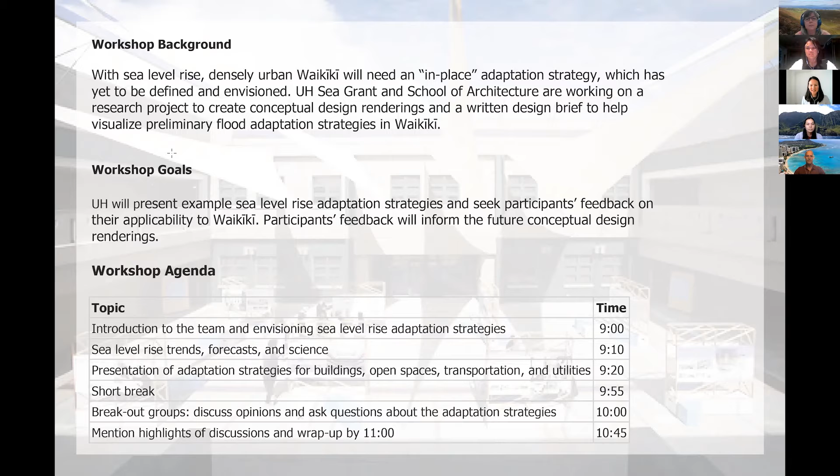To give you a little bit of background on where this workshop fits into the larger 2-year research project: first, faculty and students conducted background research, learning from emerging design, flood resilience standards and guides, case studies, and flood hazard maps. We identified the flood adaptation strategies that seem relevant for Waikiki, which we'll share and solicit your feedback on today.

Next, students will create site-specific urban and architectural renderings of a habitable, attractive, economically vibrant Waikiki with flood adaptation strategies. Finally, we will again meet with stakeholders to review and provide feedback on those draft renderings before revising and publicly sharing them. The goal of the renderings is to contribute to design guides, educational presentations, pilot projects, and new policies or incentives that prepare for future flooding.

So we're on the same page when I say renderings or diagrams, here are some examples so we have a common understanding of those terms. We'll return to these at the end of the presentation.

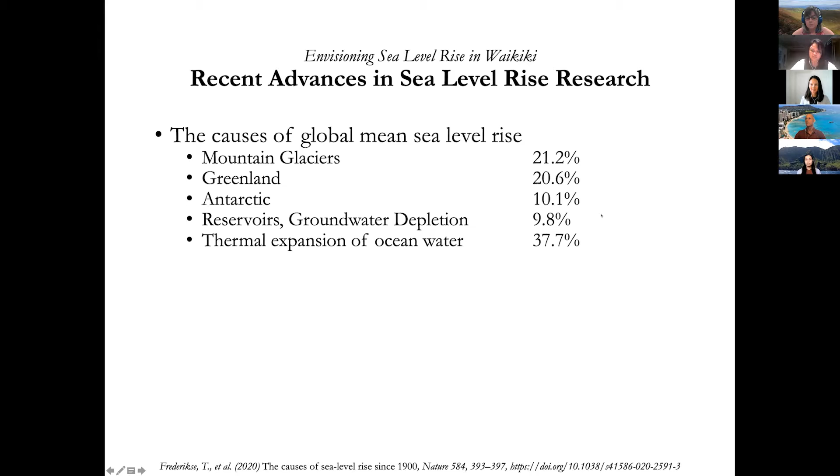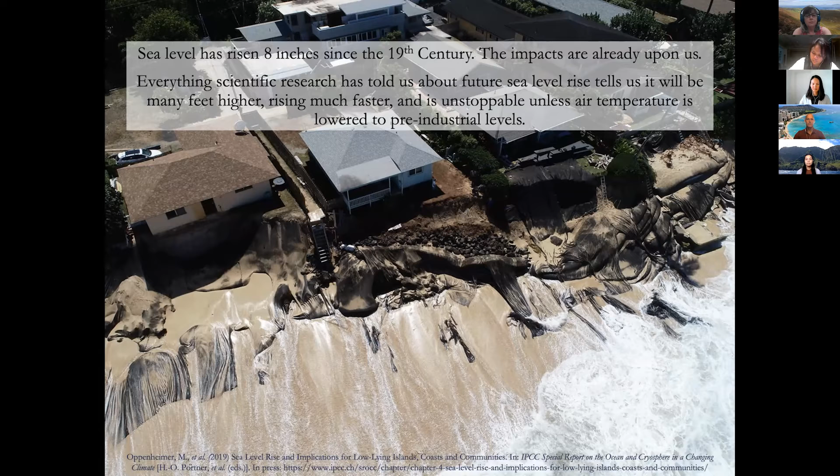Everything scientific research has told us about future sea level rise tells us it will be many feet higher, rising much faster, and is unstoppable unless air temperature is lowered to pre-industrial levels. The ocean will take many, many centuries, in fact beyond 1,000 years, to fully equilibrate water temperature with air temperature. And in so doing, it will continually thermally expand, even if we stop global warming, and even if we begin to pull CO2 out of the atmosphere.

It's been said that we need to lower atmospheric temperature to pre-industrial standards in order to get the ocean to stop thermally expanding. Hence, as Michael Oppenheimer, lead author of the 2019 IPCC report on sea level rise, says, there is no scenario that stops sea level rise this century. We've got to deal with this indefinitely.

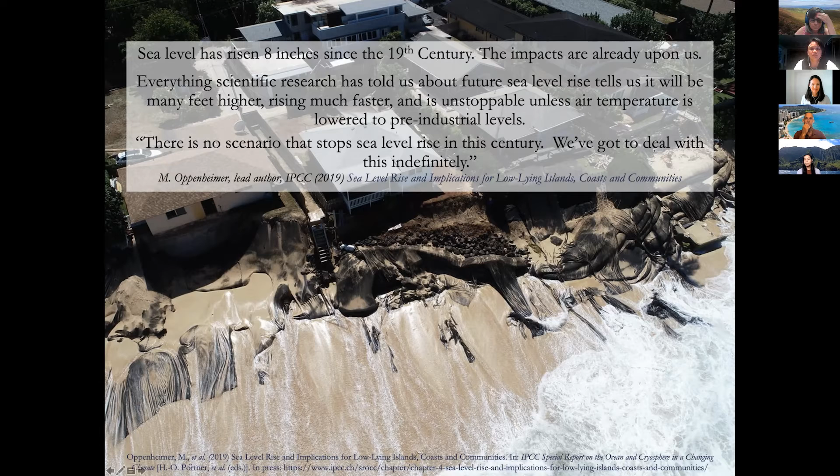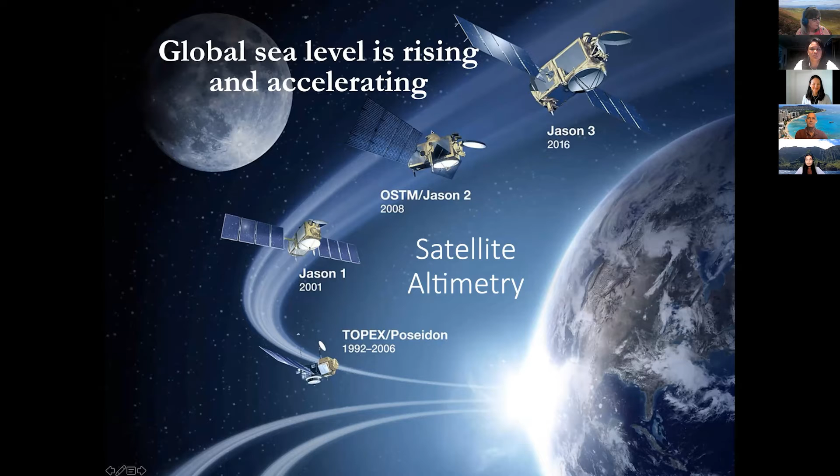So we measure sea level rise beginning in 1992 with a series of satellite altimetry missions. First was TOPEX Poseidon, and then JASON's 1, 2, and 3. These are combined missions with the European Space Agency and NASA. Here you can see the data from each of these missions. The long-term rate from the beginning of the time series in 1993 is a little over 1 foot per century.

But in the last decade, it's accelerated and it is rising at a rate of about 1.5 feet per century. And the current rate of acceleration of this time series would put it at a little over 2 feet by the end of this century. Now, the author of this information is Steve Nerem.

He published a report in 2018 extrapolating or extending the rate of acceleration, and he commented that our extrapolation assumes that sea level continues to change in the future as it has over the last 25 years. Given the large changes we're seeing in the ice sheets today, that's not likely. What he's indicating is that 2.1 feet as an estimate of global mean sea level rise by the end of the century is probably an underestimate.

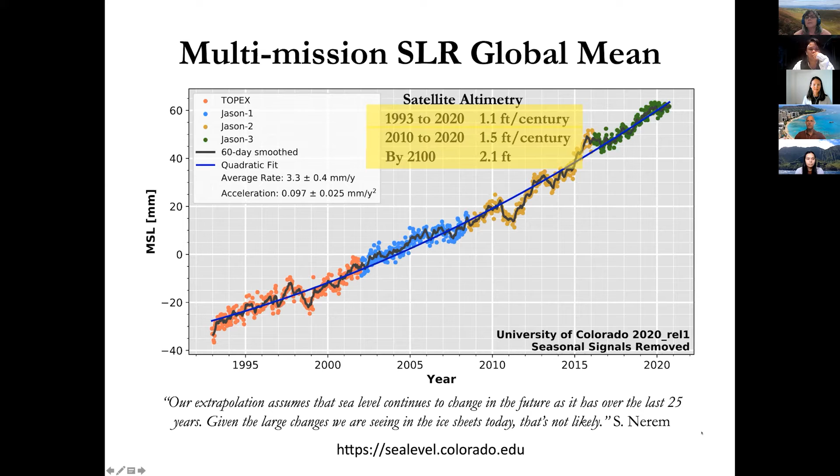So in 2020, the temperature of the oceans set a record for heat storage from the atmosphere. And as I've mentioned, it'll take over 1,000 years for the ocean to come into equilibrium with the air temperature. This entire process will lead to continued thermal expansion.

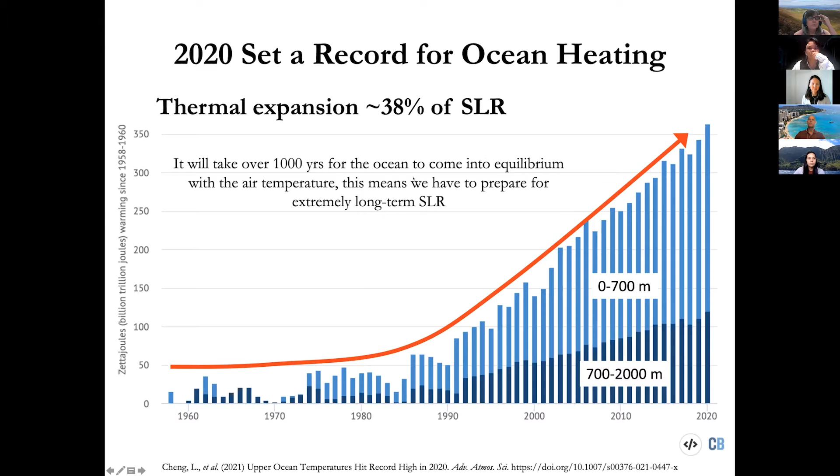Greenland is melting. The rate of mass loss from Greenland has quadrupled in the past decade. Researchers have stated that the Greenland ice sheet discharge into the ocean is far surpassing snow accumulation, and the entire ice sheet is in a constant state of loss. Even if climate change stopped, the ice sheet would still be losing mass.

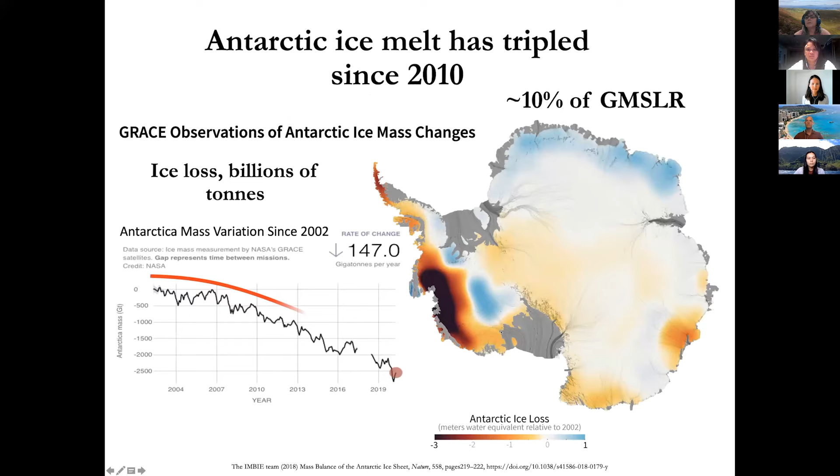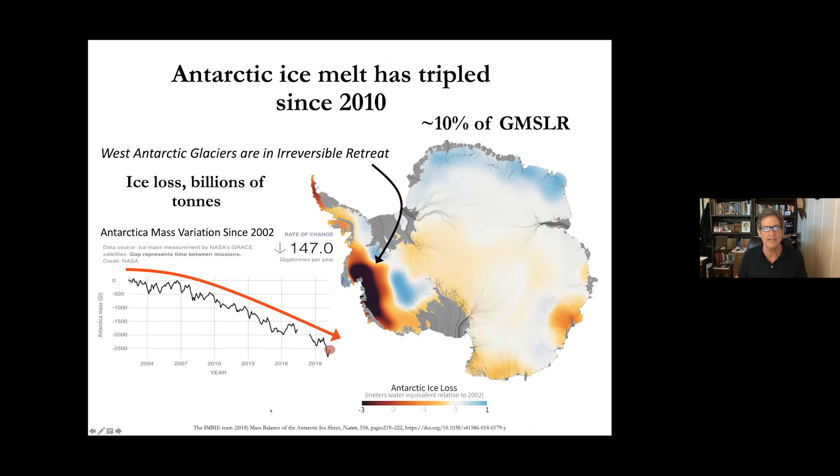Antarctic mass loss has tripled since 2010, especially this dark area where we have a number of ice streams flowing into the ocean in West Antarctica. Especially dangerous are the Pine Island Glacier and Thwaites glaciers, both shown here.

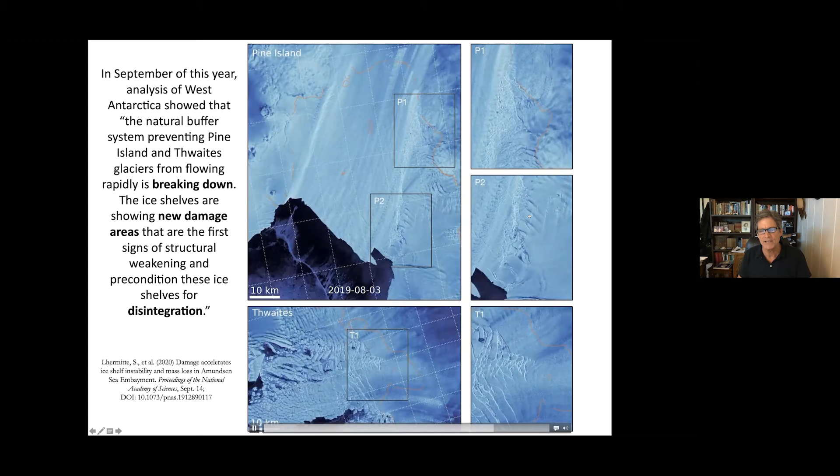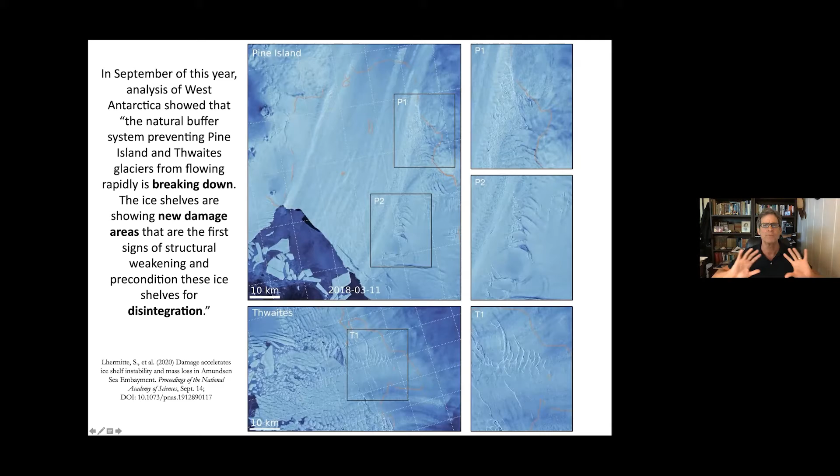This short video, especially over here in this window, accompanied a research paper that describes new disintegration of the floating ice shelves for Pine Island Glacier and Thwaites Glacier, showing these tensional fractures or rip-away fractures as the flow into the ocean accelerates. These are the first signs of structural weakening and precondition these ice shelves for disintegration. It's these ice shelves that buffer or hold back the main body of ice in West Antarctica. And when we see these ice shelves rapidly disintegrate, we worry about rapid ice flow into the ocean and the potential for multi-meter sea level rise this century.

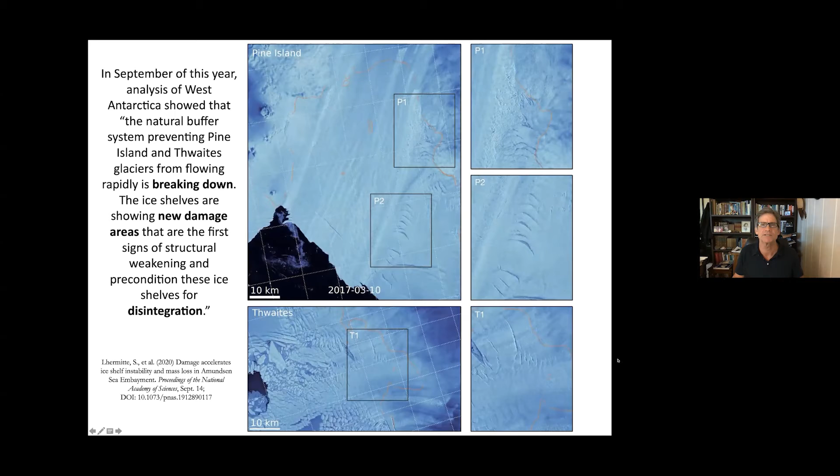We also have ice centers in many of the world's mountain systems. In every case, the total amount of ice in the major mountain systems is in retreat, and the mass loss combined into the ocean is about 280 billion tons per year. That's roughly equivalent to the amount of mass being lost off of Greenland.

Our understanding of all the components of sea level rise have led to a number of projections. The Intergovernmental Panel on Climate Change, most recently in 2019, projected global mean sea level rise of 3 to 4 feet by the end of the century if we are successful in stopping warming at about 2 degrees Celsius above pre-industrial temperatures. If we are not successful in that, then we face the prospect of multi-meter sea level rise late this century.

Now, global sea level rise and local sea level rise can be very different. And one of the main reasons for this is known as sea level fingerprinting. So if we have an ice body such as Greenland or portions of Antarctica that loses mass, its gravitational field decreases.

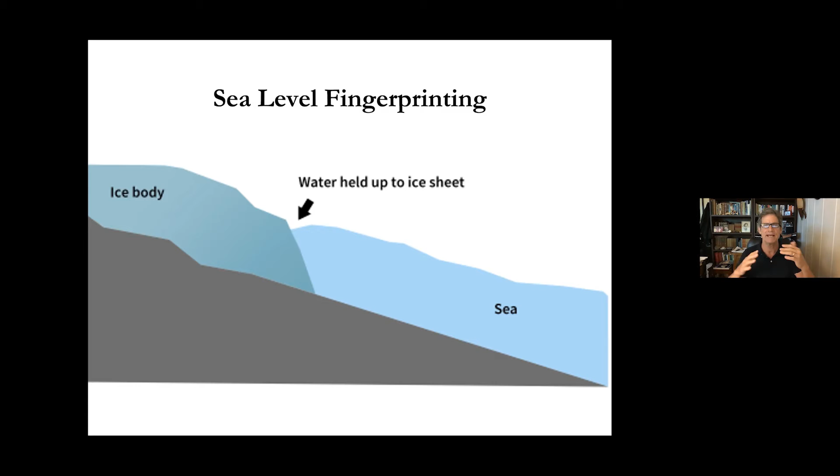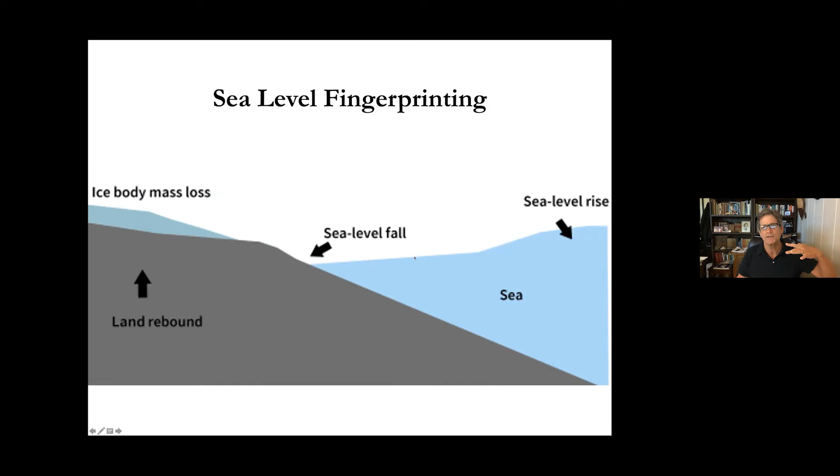And that gravitational field today is actually pulling seawater towards it. And as that field decays, seawater will flow away. And in the far field, we will see a compensating sea level rise, which is greater than the global mean, because here at the place where the gravity field is lost, we will see sea level that is less than the global mean rise. And unfortunately, Hawaii lies in the far field of all the major ice centers.

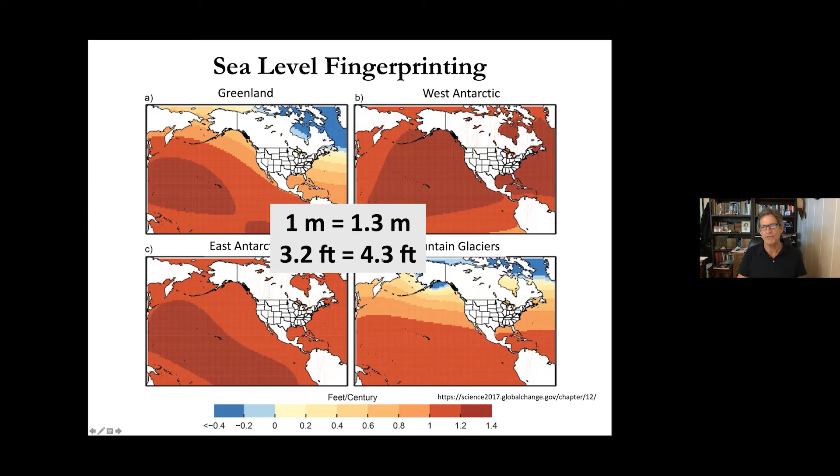The result is, if the global mean rise is projected to be 1 meter by the end of the century, we would see another 30%, or about 1.3 meters. Likewise, this common number of 3.2 feet by the end of the century would be actually 4.3 feet in Hawaii, or at least at the Honolulu tide gauge.

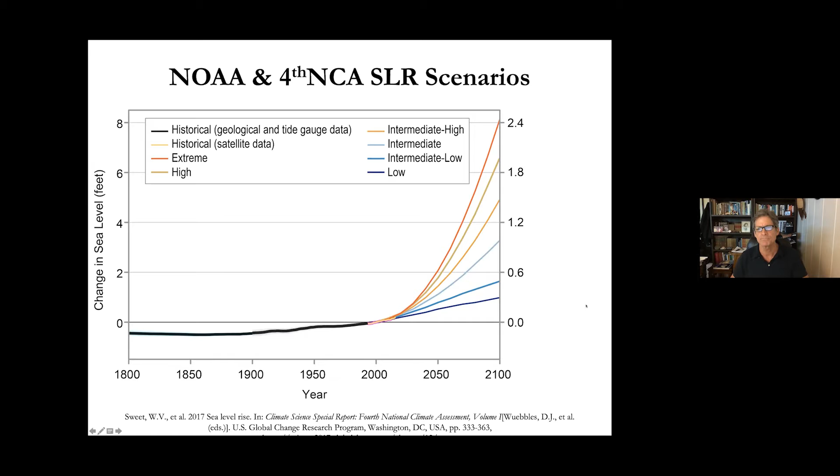Now, because there is no model that encapsulates all of these physical processes together, NOAA has provided planners with 6 scenarios on which to base their community planning. The lowest 2 scenarios here, the low and intermediate low, do not reach that 2.1 feet of sea level rise by the end of the century that the current global mean acceleration would reach. And so we're going to discount these 2 lowest scenarios. That leaves us with the NOAA intermediate scenario of about 1 meter for planning purposes by the end of the century.

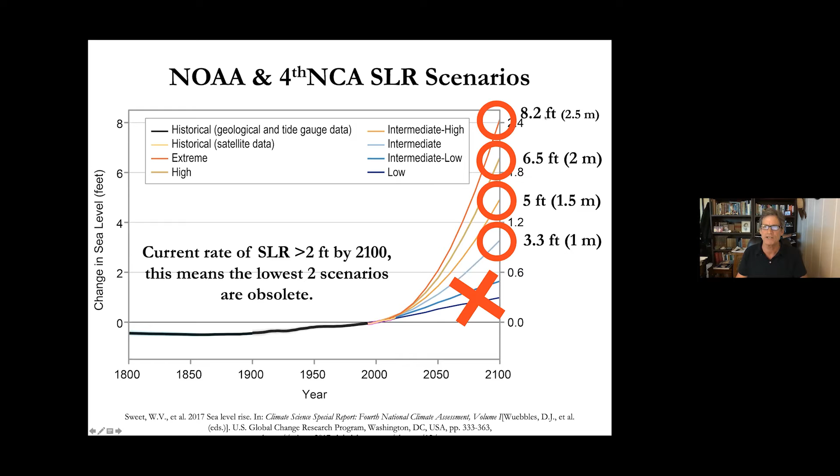And depending on the risk tolerance of a planner's project and the high uncertainty, especially of the West Antarctic ice sheet, a choice can be made for some of these higher scenarios, especially what's known as the extreme scenario of 2.5 meters or over 8 feet by the end of the century, for projects with a very low tolerance for risk.

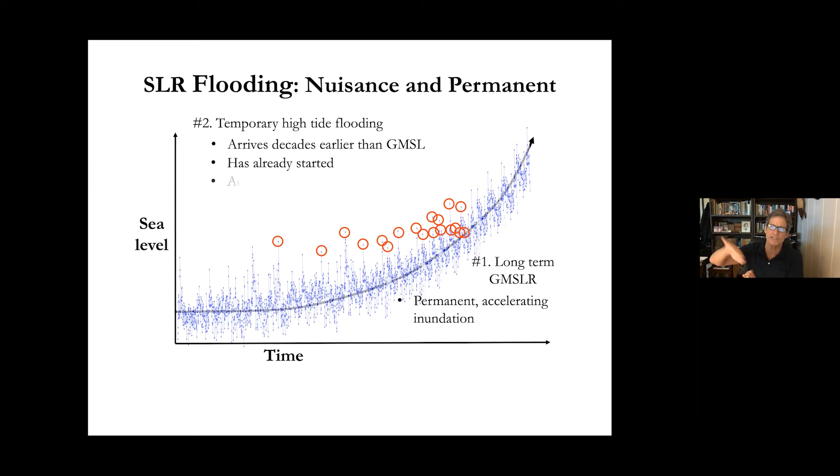But we are familiar with the fact that sea level has already entered our neighborhoods in the form of king tides. Extreme tide flooding arrives decades ahead of this exponentially rising permanent inundation curve. And as we get closer and closer to the permanent inundation of this black line, we see accelerations in the frequency and magnitude of this king tide flooding.

And all of that is modulated by gravity processes associated with our proximity to the moon and sun as we move forward. This has most recently been published by Phil Thompson and his team at the Hawaii Sea Level Center.

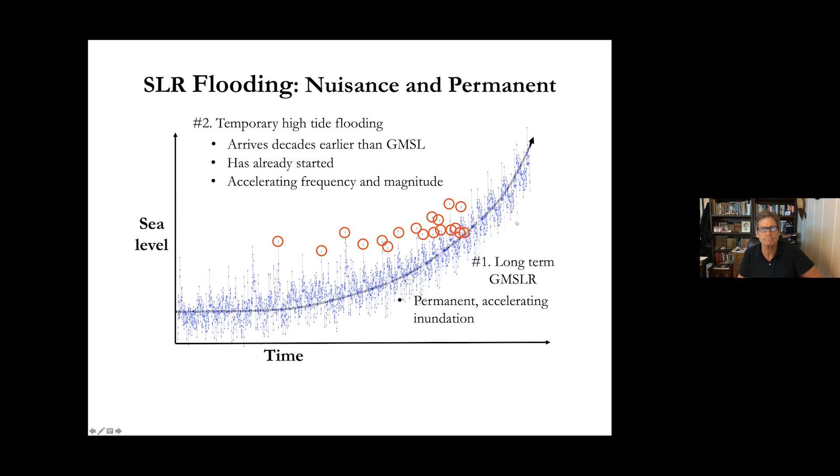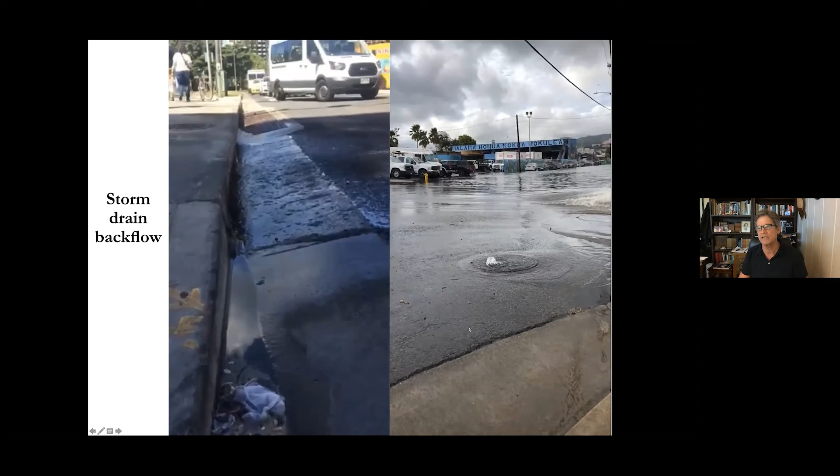What does sea level rise look like as it enters our communities? We see storm drain backflow. We see flooding from the drainage system. Here on the left side, we're looking at Waikiki, and on the right side, we're looking at Mapunapuna. These are what extreme tide flooding looks like.

We also know that the water table moves in coordination with the ocean tides. And so as the ocean rises, the water table beneath the land will rise. In Waikiki, we only need 2 feet of sea level rise before we see dry land turning to wetlands at the high tides.

If we combine this groundwater inundation and the storm drain backflow with an intense rainfall event, we end up with flooding because there's no place for runoff to go. There's no drainage capacity.

Dr. Shelley Habel of the UH Sea Grant program modeled all of these processes in her PhD project. Here you see one model result for sea level rise of 1 foot above present. Purple indicates groundwater flooding, green indicates storm drain backflow, and blue indicates direct marine flooding across the shoreline. These pink dots indicate where individual storm drains are blocked by high seawater.

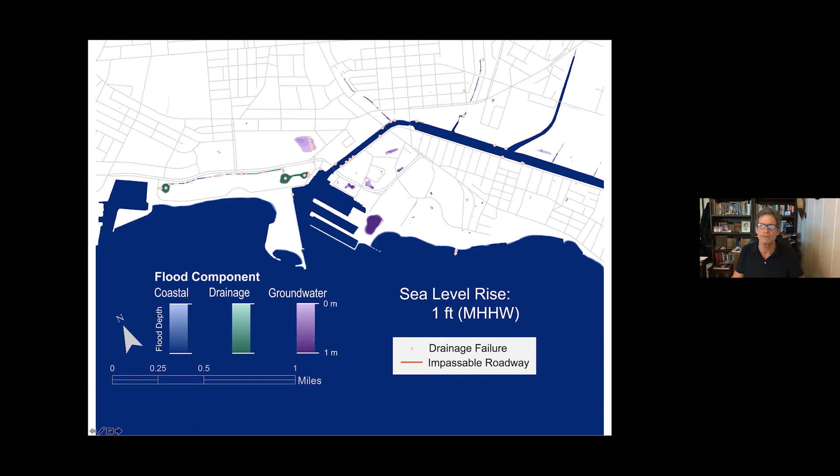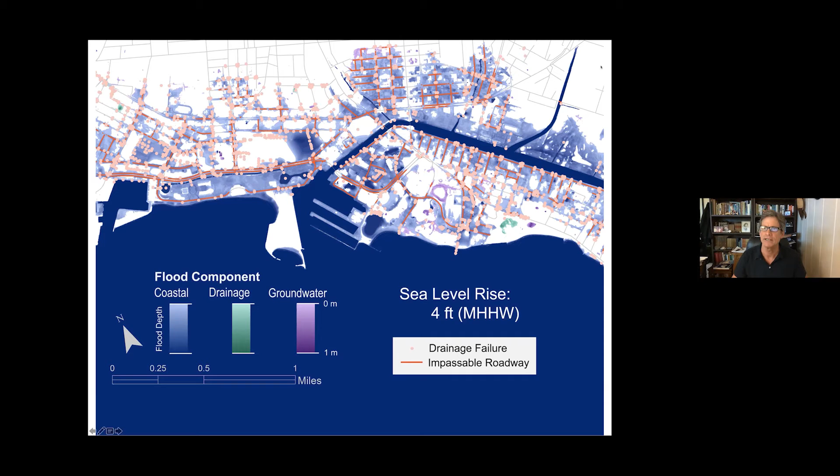So here is 1 foot of sea level rise, 2, 3, and you start to see these red lines. This is 4 feet, projected for the local sea level rise by the end of the century using sea level fingerprinting. These red lines indicate that we have exceeded the transportation engineering threshold of 6 inches of standing water, where a small vehicle driving through that will create a bow wave that comes back into the engine compartment and potentially stalls the vehicle. This would basically shut down a street as an option for automobile transportation.

There is 5 feet. So let's summarize. West Antarctic glaciers are the current greatest source of future sea level rise uncertainty. The science is still unsettled.

Planning in general should be risk averse, and the Honolulu Climate Change Commission recommends establishing the area to be flooded under 3.2 feet, which is very roughly 1 meter, as a planning benchmark by the end of the century. High tide flooding will arrive decades earlier in that area.

Global emissions and amplifying feedbacks are currently projected to cause about 3 degrees Celsius of global warming. I didn't get a chance to go into that, but this is a conclusion that's widely accepted.

Critical infrastructure projects with long expected lifespans and low risk tolerance because of this should set 6 feet at least as a sea level rise planning benchmark.

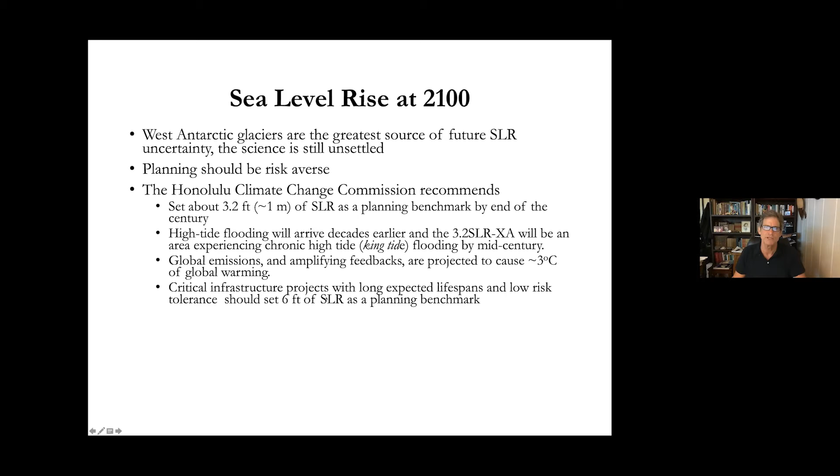The area experiencing, or that is mapped as exposed to, 3.2 feet of sea level rise will experience chronic high tide flooding decades ahead of permanent inundation.

So we should consider about 1 meter as a minimum, and projects can use the NOAA sea level rise scenarios, picking the scenario that best fits the budget, timeline, and risk tolerance. And I'll end with that. Thanks very much. Back to you.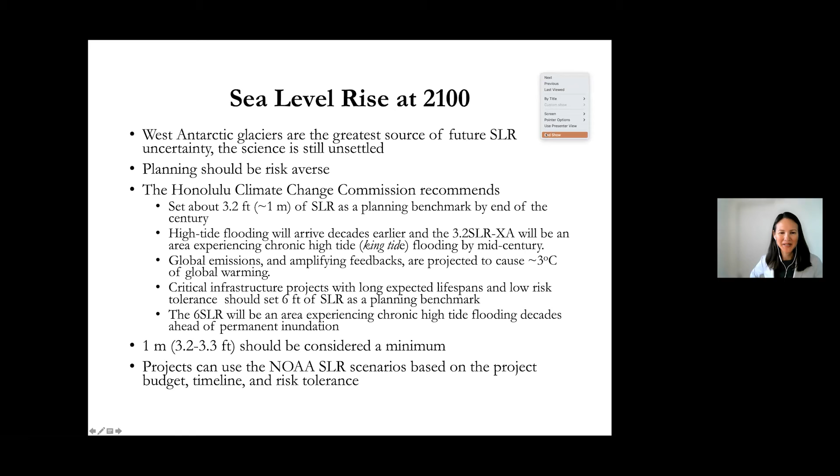Thank you, Chip. So now that we know a little bit more about the sea level rise science and the implications of the temporary or permanent inundation or flooding, next we're going to go over some potential flood adaptation strategies that we think are appropriate for Waikiki. These will be presented by our graduate research assistants, Ireland Castillo and Jojo Briones.

Good morning, my name is Ireland Castillo, and today we'll be looking at adaptation strategies related to buildings, open spaces, transportation, and utilities.

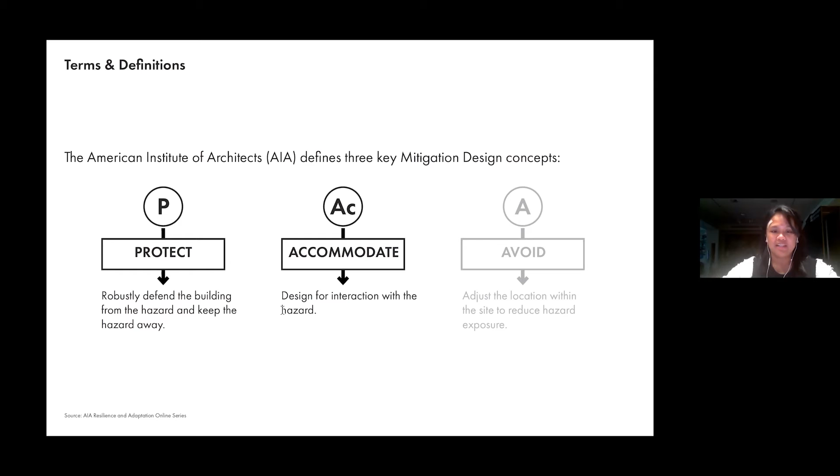Some terms and definitions that we'll be using throughout the presentation include the terms protect, accommodate, and avoid. Adopted by the American Institute of Architects, or AIA, we've categorized the following strategies based on these definitions. For in-place flood adaptation in Waikiki, we've identified strategies that protect or accommodate.

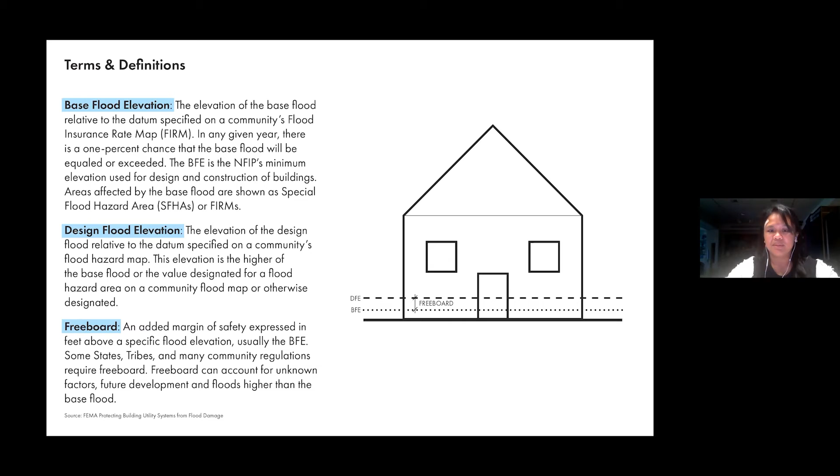Some terms you may be familiar with, which we'll be using throughout our presentation, include base flood elevation, or BFE, design flood elevation, or DFE, and freeboard. The diagram shown to the right is adopted from the Boston Coastal Flood Resilience Design Guidelines, showing the relationship that the BFE, DFE, and freeboard share.

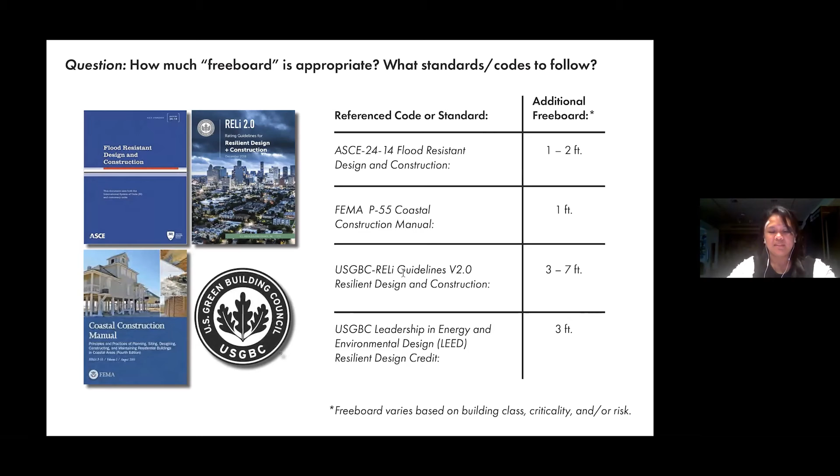Honolulu has adopted the 2012 International Building Code, and this requires that new construction be designed with 1 foot of freeboard above current base flood elevation levels in hazardous flood zones, according to ASCE standards. For our project, we align ourselves to the codes and standards enforced by the city, and suggest creating new design flood elevations that account for building criticality, lifetime, and risk.

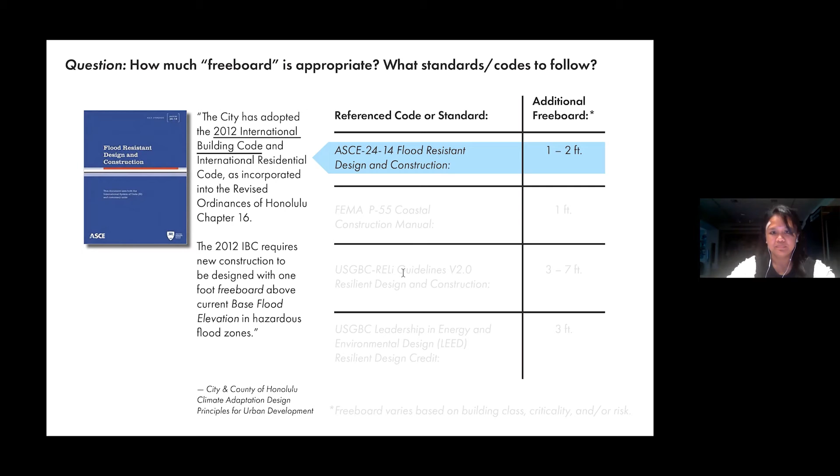In order to identify appropriate flood adaptation strategies, we first surveyed flood resilience standards, guides, and case study projects as listed here. The ideas presented today align with Honolulu's climate adaptation design principles for urban development.

Thanks, Ireland. My name is Jojo, and as mentioned earlier, in the following slides we'll review various flood adaptation strategies and discuss how they'll be applied to the buildings, open spaces, transportation, and utilities in Waikiki. We'll be asking for your feedback in between. Most of the examples refer to adaptations of existing buildings, but the principles may also be applied to new building design. Starting off, we'll jump into buildings. Next slide, please.

We'll look into strategies to protect from or accommodate flooding for buildings in Waikiki.

The first strategy is to elevate buildings above the design flood elevation, either on an open foundation or elevating on fill.

Another protection strategy would be to dry floodproof by making a structure watertight below the level that needs flood protection. This is appropriate for non-residential buildings.

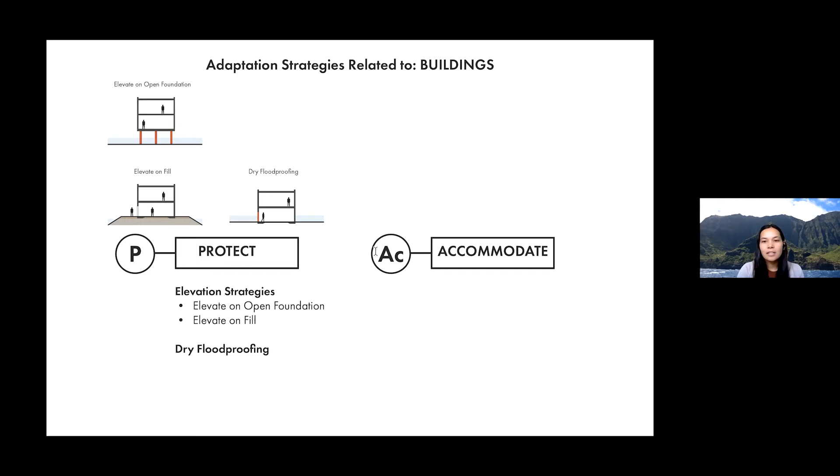Moving on to relocation, strategies include reevaluating spaces below the DFE to become non-occupied uses or to be filled.

As well as relocating those critical systems above the DFE.

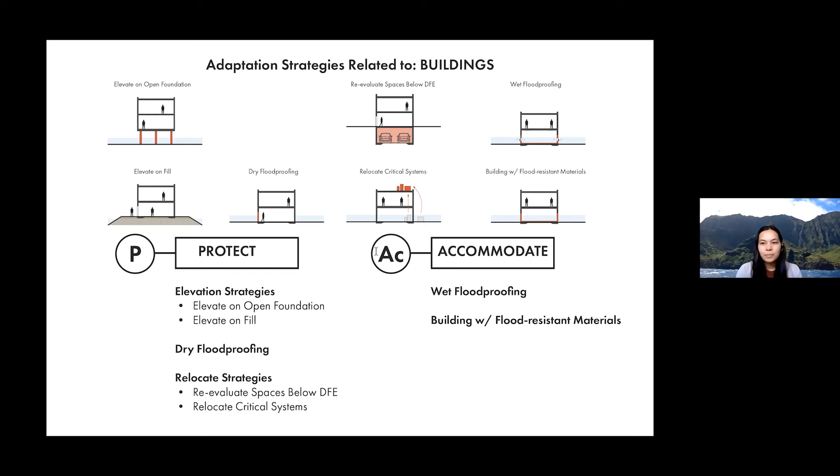For accommodation strategies, they include wet floodproofing, which allows water to enter into the space, as well as building with flood resistant materials.

We'll illustrate next how these flood adaptations might be applied to a typical existing building condition in Waikiki with below grade, at grade, or above grade occupied spaces, and then solicit your feedback.

First, we'll go through the below grade occupied spaces and/or parking.

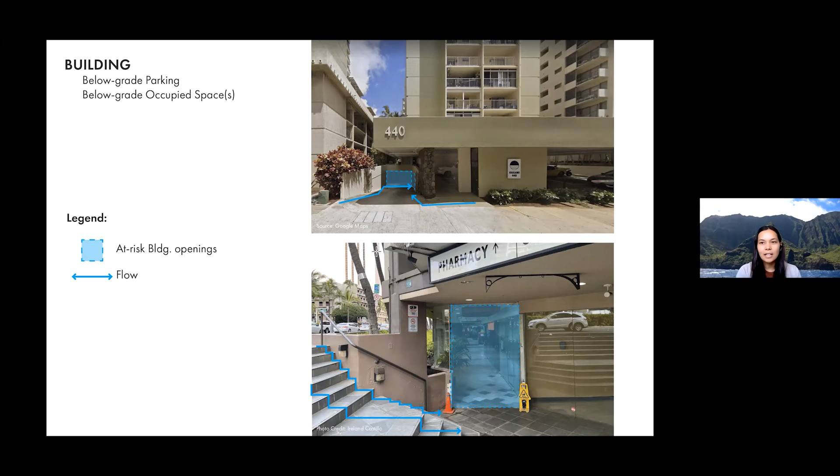In the below grade spaces, we propose to prioritize the actions of first relocating critical systems, then wet floodproofing and building with resistant materials, and then if possible reevaluating those spaces entirely that are below the DFE.

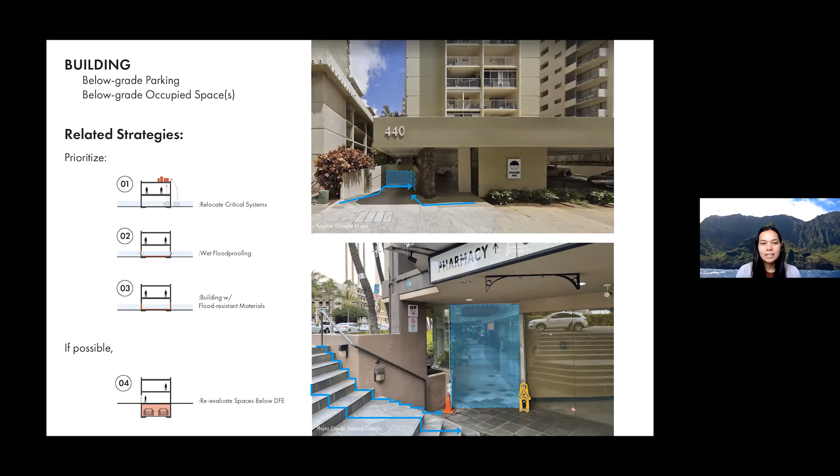On the next few slides, we'll reference diagrams from the Boston Coastal Flood Resilience Guidelines. On the left are their diagrams, and the photos on the right show the actions in practice.

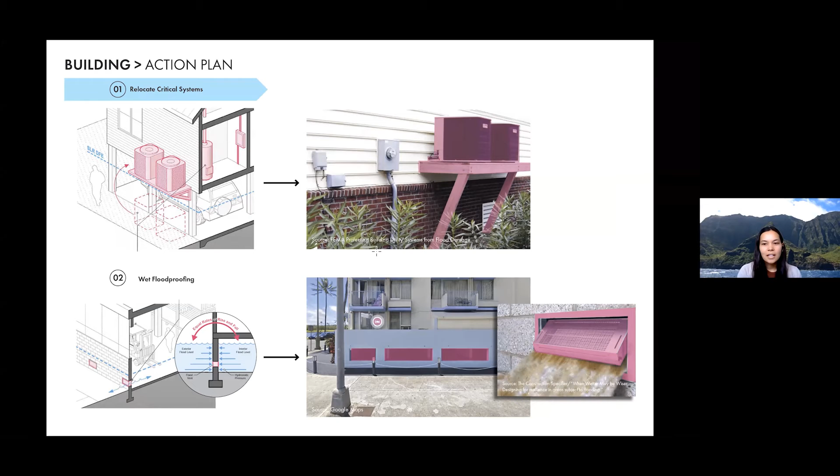This diagram on the bottom left and the photo on the right show wet floodproofing, where the building has flood vents that allow water to flow freely in and out of the flooded space to help reduce or equalize the hydrostatic pressure that could otherwise severely damage the building.

Wet floodproofing is a strategy that is built into the City and County of Honolulu's revised ordinances.

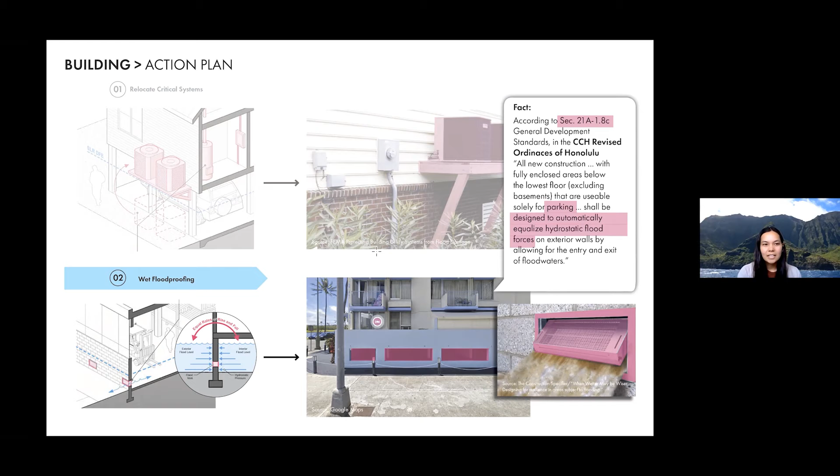Spaces below the DFE can also be built to be flood resistant with flood resistant materials, and FEMA lists acceptable materials and their applications as well as unacceptable materials.

Lastly, when reevaluating spaces below the DFE, previously occupied spaces should be filled to the lowest adjacent grade and converted to non-habitable spaces, such as storage.

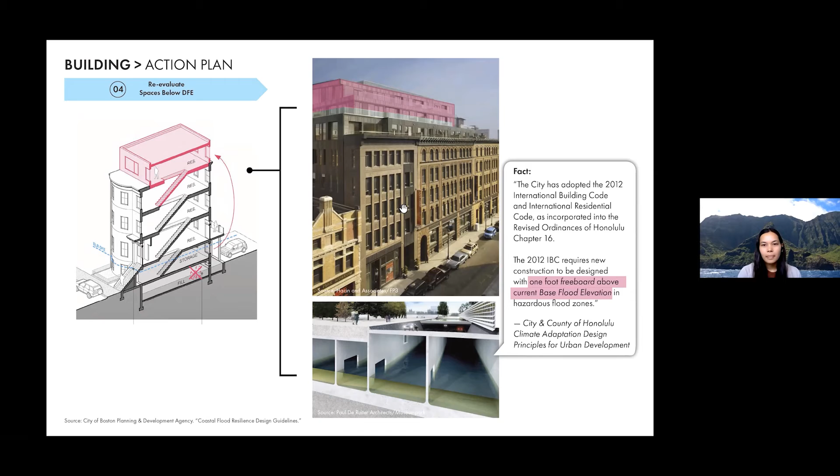We'll move on to at-grade occupied spaces.

Waikiki has many examples of commercial and residential buildings with openings at grade.

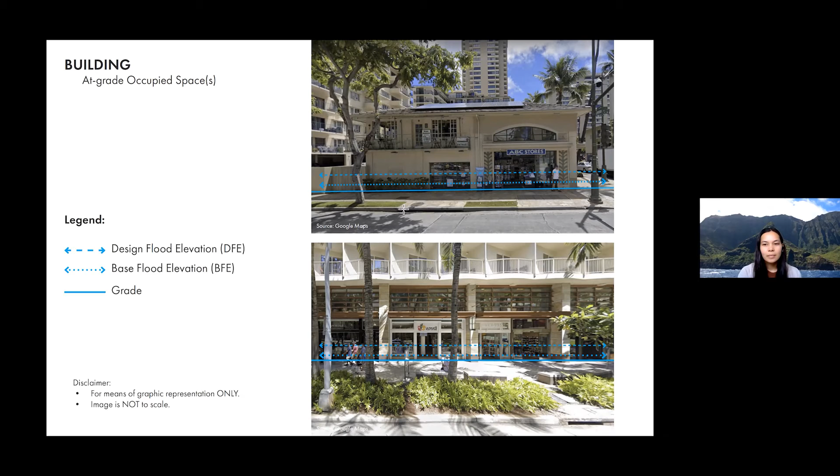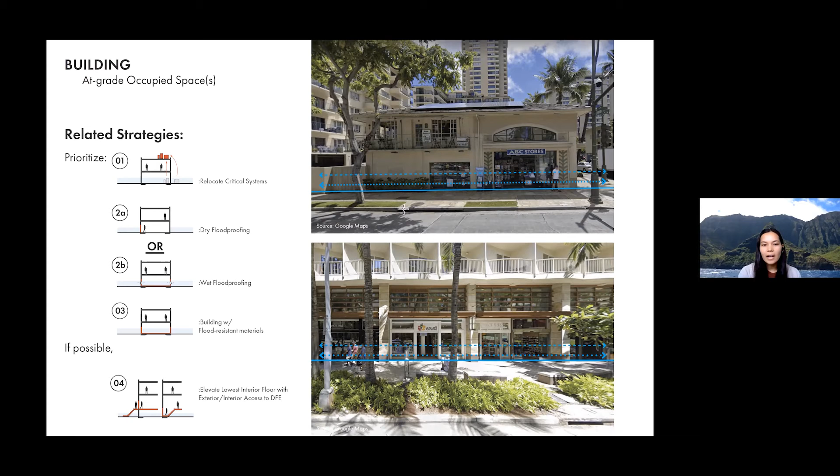The at-grade spaces could utilize strategies we mentioned previously, in addition to dry floodproofing and elevating the lowest interior floor with interior or exterior access to the DFE.

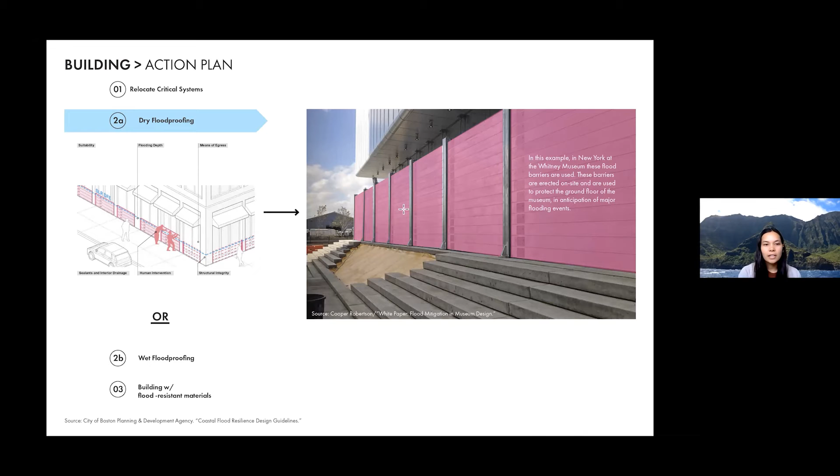Dry floodproofing makes a structure watertight below the level that needs flood protection. This photo on the right is an example of the Whitney Museum in New York City with temporary flood barriers deployed in anticipation of a major flood event.

The next strategies are to elevate the lowest level interior floor with exterior access to the DFE. The top right shows a photo of the newly constructed Whole Foods in Ward Village, showing the elevated lowest interior with exterior access, as well as an elevated sidewalk.

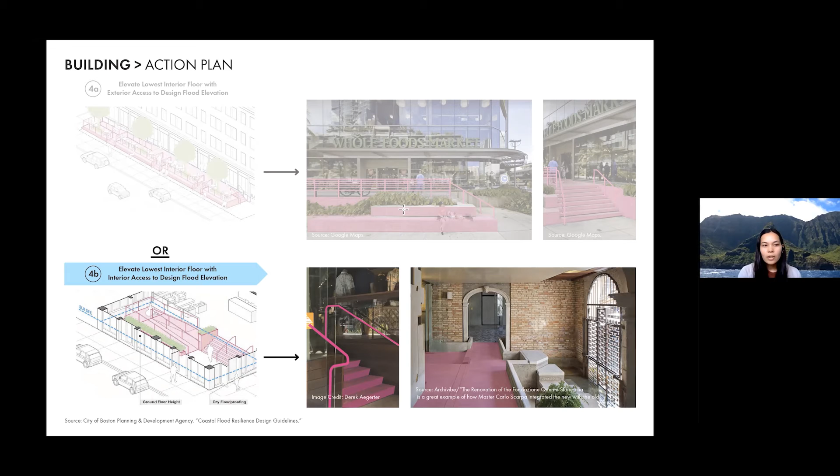Alternatively, we can elevate the lowest interior floor with interior access to the DFE, shown here in the bottom photos with an example of interior stairs to an elevated interior floor, both in Waikiki and in Venice, Italy.

So last, we'll move on to above grade occupied spaces. These two photos here represent some typical conditions we see in Waikiki of a low-rise residential walk-up and a high-rise apartment complex or hotel.

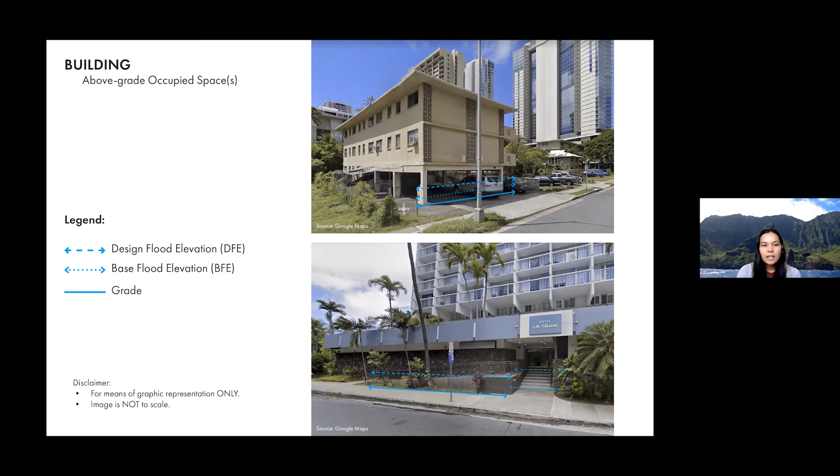Again, although this is a representation of the BFE and DFE that are not to scale, it seems likely that the occupied spaces may already be above the DFE.

So these buildings that are already elevated on an open foundation or elevated on fill might have actions for the future of relocating critical systems, or re-evaluating spaces below the DFE if they have any.

As stated in the Boston Design Guidelines, existing or new buildings elevated on an open foundation must be designed to structurally resist the design flood loads, be geotechnically stable, and protect from erosion. Once flooding becomes frequent, parking would likely be relocated.

So existing buildings that may already be elevated on fill should be compared to future proposed design flood elevations. And lastly, new buildings would likely be elevated on structural fill to meet the DFE.

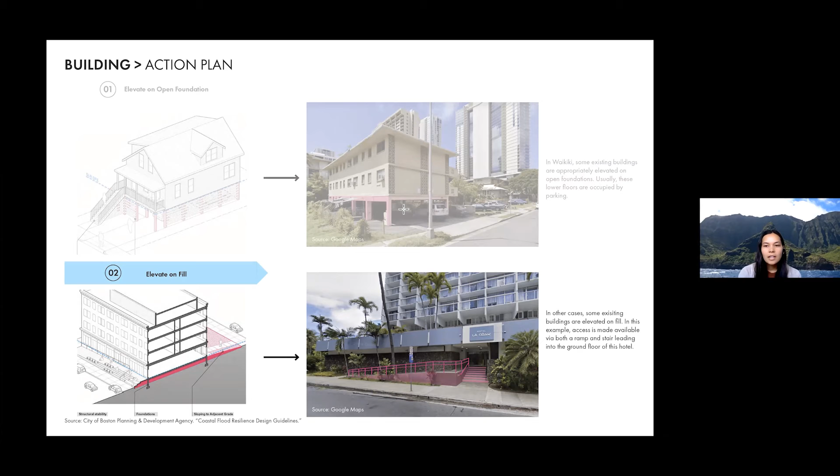And now I'll pass it to Eileen for a short survey on the previous slides we just talked about. The next part of the survey will ask you for your feedback on the strategies that were just presented.

Next, we'll be going over adaptation strategies related to open spaces. As mentioned, as the groundwater table rises and storm drains back up in Waikiki, rainfall may not easily infiltrate into the ground or be quickly drained to storm sewers.

So in our case, we've proposed strategies to modify existing open spaces in Waikiki to encourage the collection, temporary detention, and filtration of runoff from large rainfall events. Proposed strategies include cisterns and water collection, floodable open spaces, and what we've termed ecological water treatment.

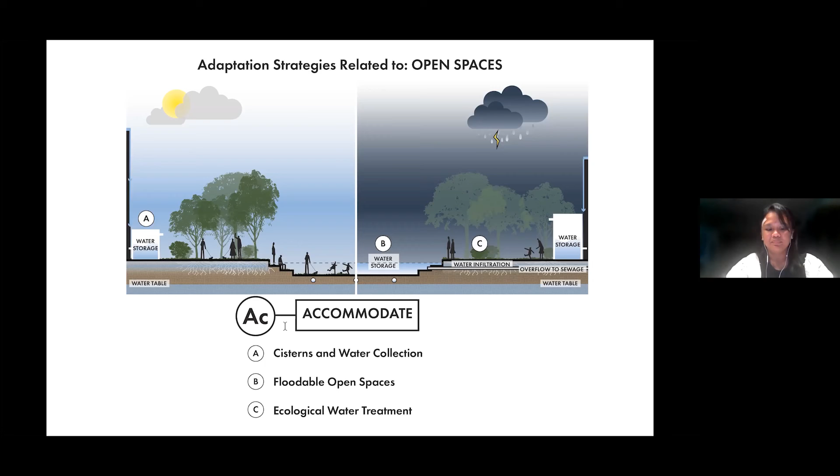The strategies presented apply to new and/or existing open spaces, including landscaped areas and/or parks, parking areas, and existing vacant lots. We will illustrate the following strategies through three case studies.

First, buildings and landscapes may be designed to direct rain and stormwater runoff to cisterns for non-potable use or for delayed discharge to the storm sewer. This aligns with Honolulu's One Water for Climate Resiliency white paper and has potential co-benefits such as reduced potable water use.

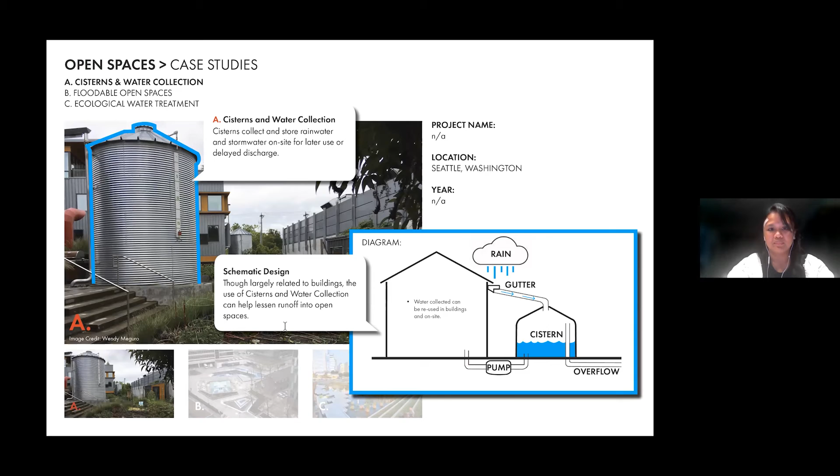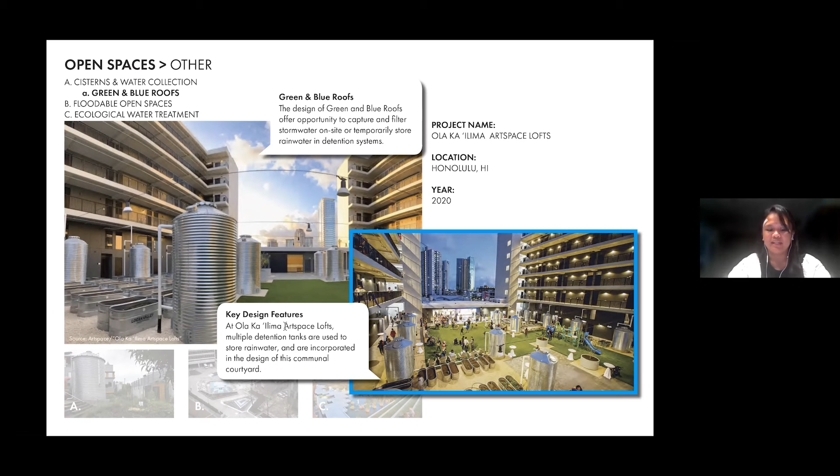In addition to our discussion of cisterns and water collection, we're also interested in the design and use of green and blue roofs. In this example, Ola Ka ʻIlima Artspace Lofts is a great local example of multiple detention tanks being used to store rainwater while tastefully incorporated in the design of this communal courtyard.

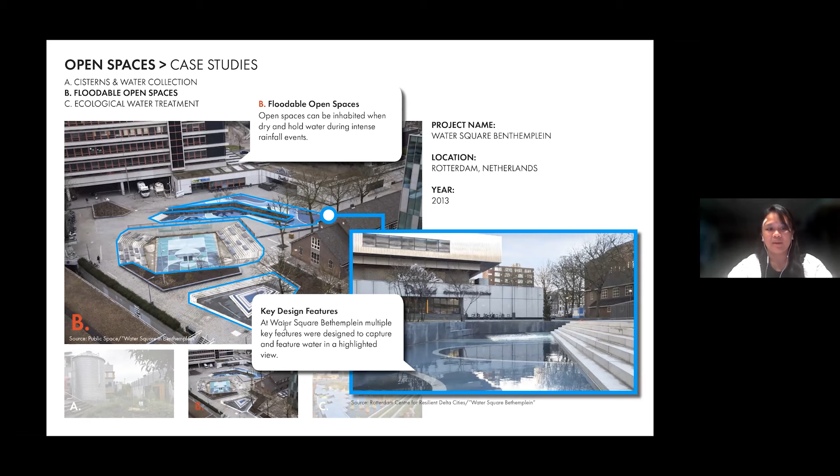Our second case study shows floodable open spaces where, as outlined in blue, the basins at Water Square Benthemplein in Rotterdam, Netherlands, may provide public amphitheater seating when dry, and when wet, hold water for delayed discharge during large rainfall events.

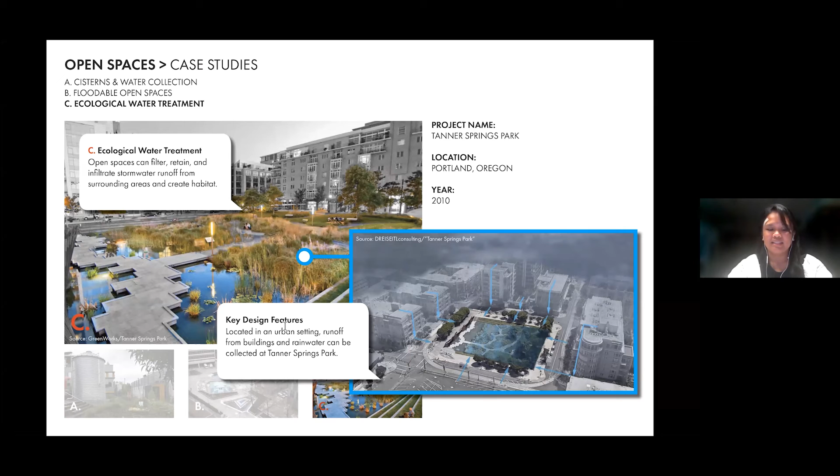Lastly, Tanner Springs Park in Portland, Oregon exemplifies ecological water treatment. This urban park receives stormwater runoff from the entire block, where it is filtered and cleansed in a constructed wetland. This creates habitat while creating a park-like setting for the public to enjoy.

Similarly, we'll go through another set of questions related to these strategies. The next part of the survey will ask you for your feedback on the strategies that were just presented.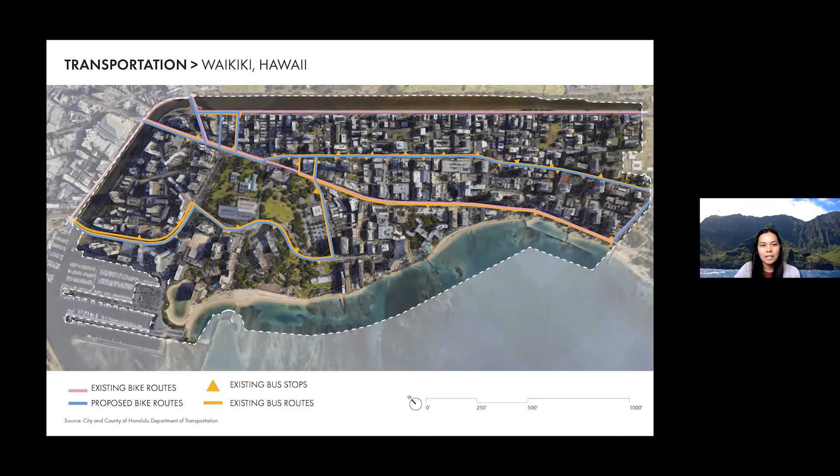We'll consider how transportation ways may be transformed to be resilient for future flooding. And we've chosen to highlight these two case studies that are located in Miami and Honolulu.

This first case study is in Purdy Avenue in Miami Beach, Florida, showing the adapted elevated street on the left and flooded before condition highlighted in blue. Some of the roads were raised as much as 2.5 feet, higher than their original elevation of 1.2 feet.

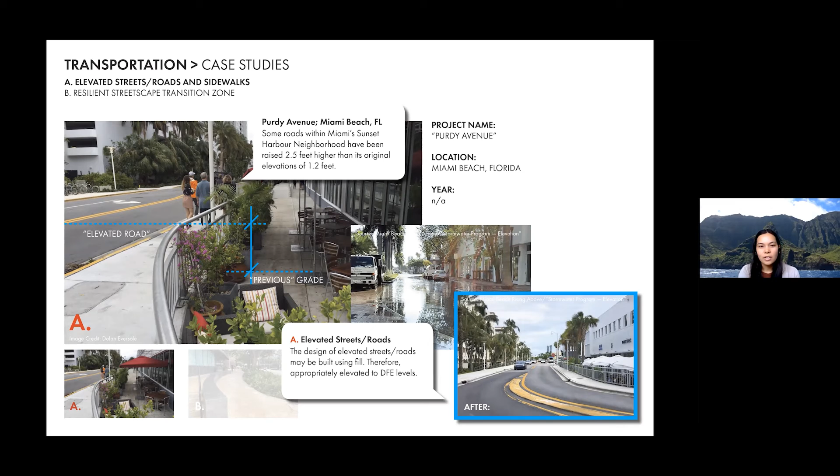And then this image on the right, now highlighted in blue, shows the street after it's been elevated on fill. Next slide, please.

This case study, built in 2016, shows raised walkways and resilient streetscapes, transition zones here in Honolulu at the Ward Village South Shore Market. Here the pedestrian zone is emphasized. The trees provide shade and a planter strip separates the road and the sidewalk. Again, I'll pass it to Eileen for a survey.

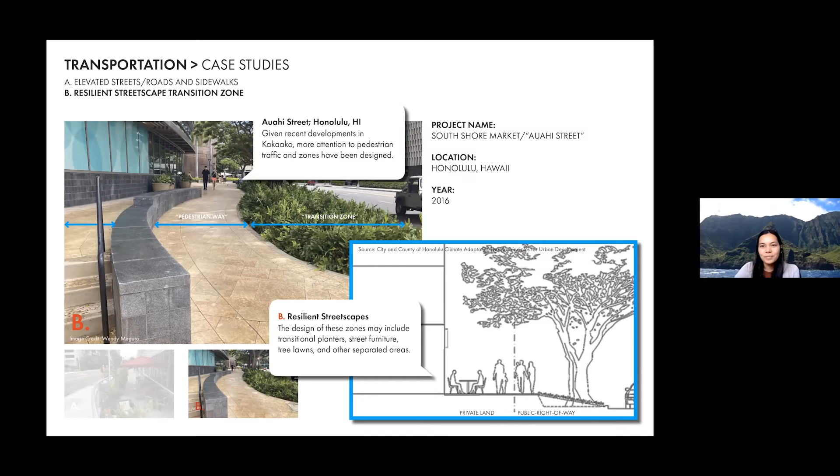The next part of the survey will ask you for your feedback on the strategies that were just presented.

Lastly, we will be looking into adaptation strategies related to utilities.

Continuing our discussion on the topic of raising the street on fill, we've looked into specific strategies like: one, relocating critical equipment; two, protecting and replacing city utilities by relocating them within the proposed fill and creating vaults; and lastly, incorporating some type of potential below-grade stormwater storage within the proposed fill.

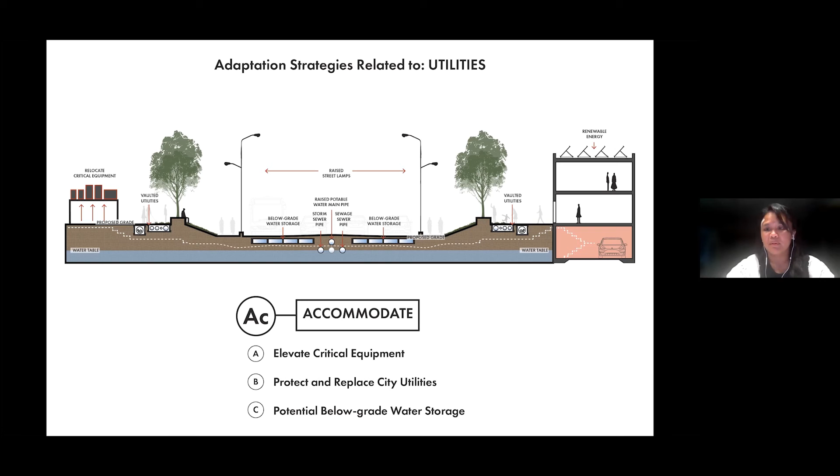We are considering how utilities, including electricity, water, sewer, gas, telecommunications, can be resilient in the future of sea level rise. We'll describe two case studies applicable to Waikiki.

A good local example of what elevating critical equipment could look like can be seen on Queen Street, right behind South Shore Market. Here, it's elevated on some type of concrete platform.

Utilities may also be protected from flooding if placed in vaults, as outlined in blue, in ARO and DLANDstudio's speculative project for the Museum of Modern Art exhibition, Rising Currents, Projects for New York's Waterfront, where they had proposed this idea as well. Honolulu's Climate Adaptation Design Guide also illustrates utility vaults placed beneath the streetscape transition zone.

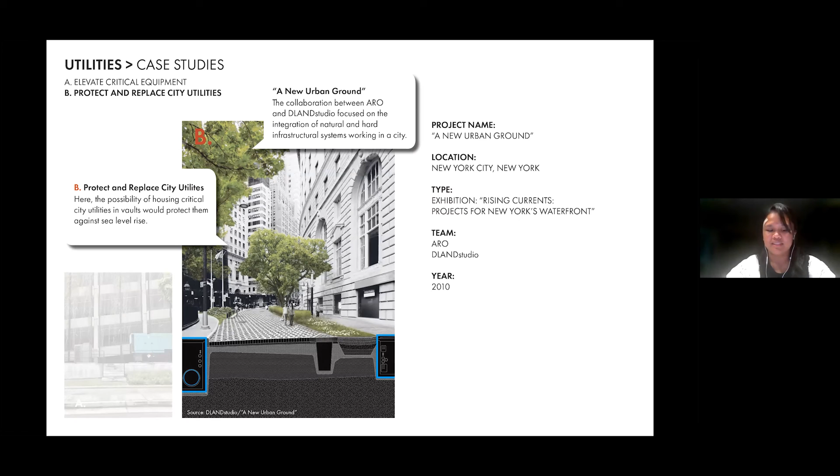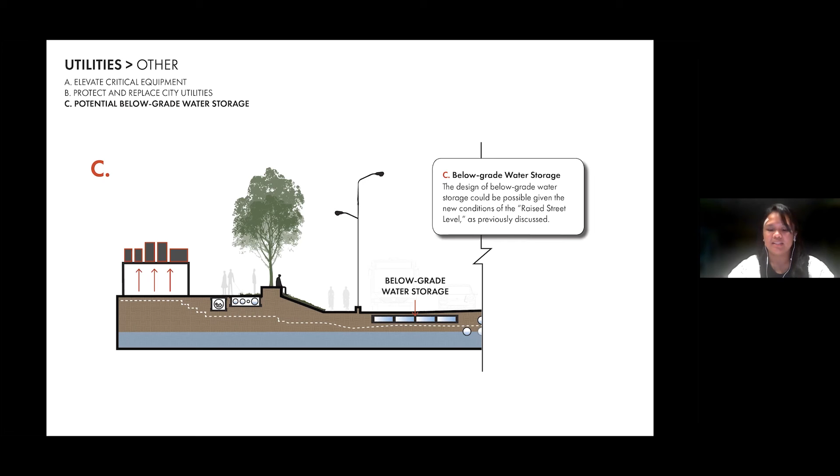And as we raise the streets, we see an opportunity to provide some type of below-grade water storage in the new proposed fill. The cisterns would temporarily detain stormwater in a large rainfall event and be pumped out afterwards.

For these strategies, we'll go through one survey, some similar survey questions. The next part of the survey will ask you for your feedback on the strategies that were just presented.

So the next set of slides are intended to give you an idea of the renderings that we are envisioning. These ones were created by student Kaimana Tuazon in the graduate elective course at UH.

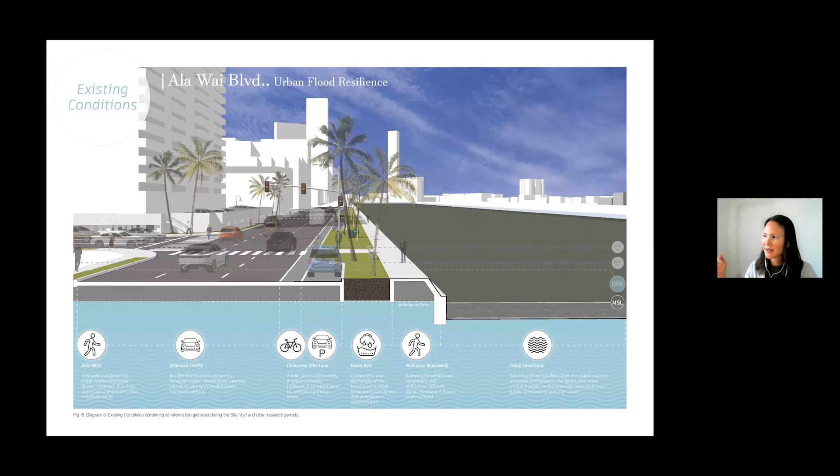So here, the existing conditions you might see include the Ala Wai on the right-hand side and the existing streetscape and sidewalk. When we start thinking about 3 feet of sea level rise, some potential design strategies might include...

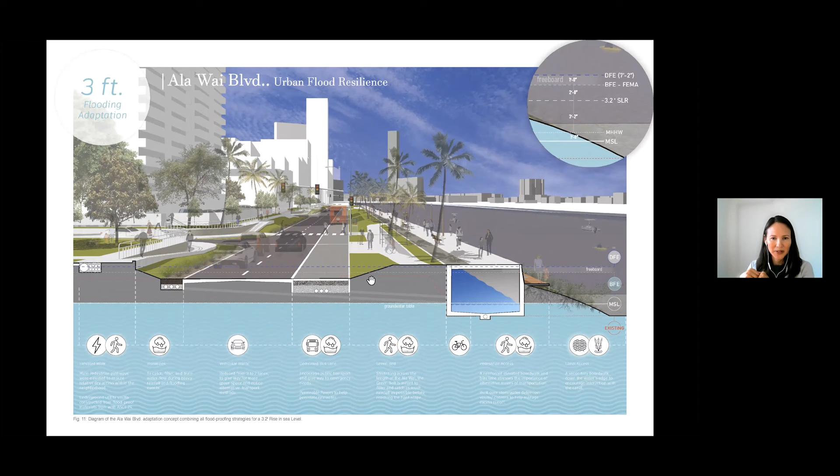...elevating the sidewalks on either side, providing that resilient transition zone with vegetation, elevating utilities below grade, and then providing a cistern below grade in order to temporarily hold stormwater.

And we want to think in this project over time how we might continue to adapt. So projecting forward to 6 feet of sea level rise, here you see further elevation of sidewalks and bike lanes.

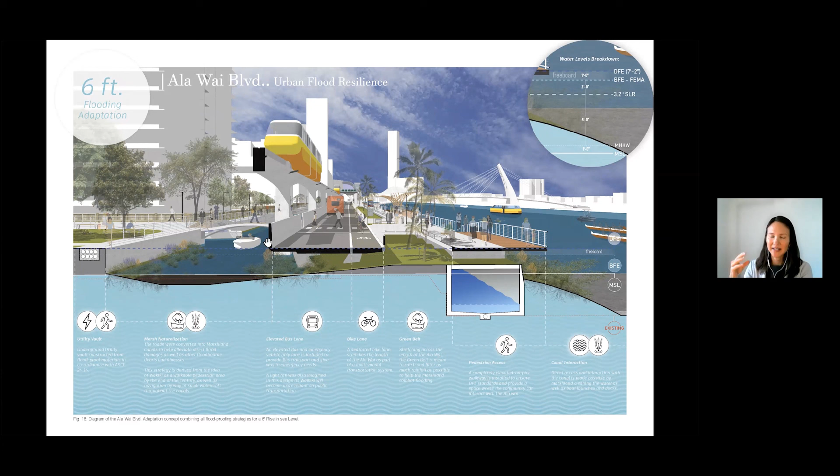Vehicular transport is limited now to 1 lane for public transport and emergency vehicles. And other modes of transportation are emphasized, like the rail or boat transportation.

And all of these strategies can also be seen on a building scale. So one existing condition that we encounter in Waikiki are below grade spaces that are below the base flood elevation or a future design flood elevation.

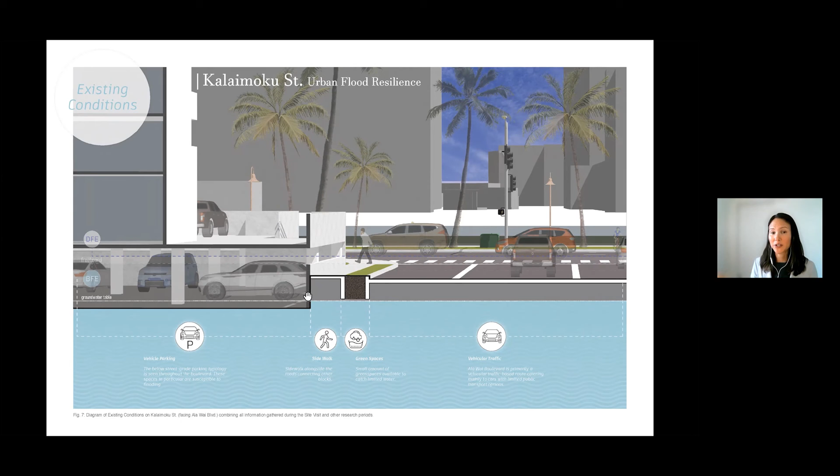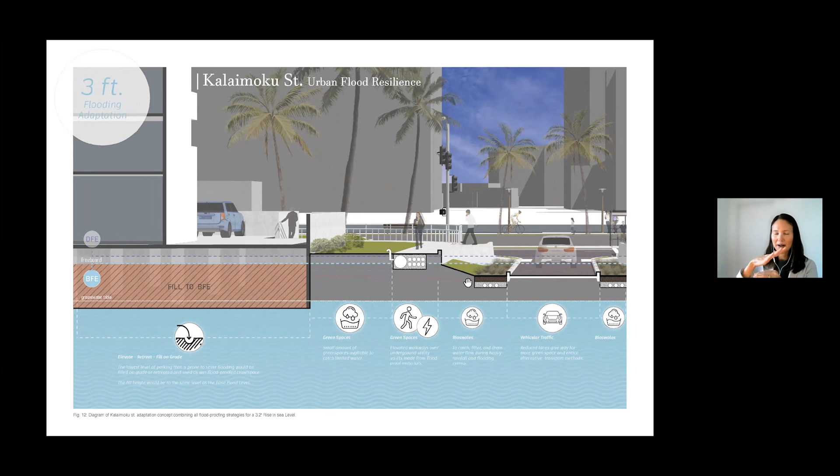So potential strategies include filling that below grade space, elevating the sidewalk, including elevating utilities, and considering the transitions between the street, the sidewalk, and the building.

And all of those elements come together in more lifelike renderings. And those renderings can depict different scenarios of adaptation strategies over time and help to coordinate discussion between multiple groups and give feedback on the feasibility, phasing, and benefits or concerns with these types of strategies.

So again, these are student preliminary renderings. Our next step in this research project is to create other renderings, and we're incorporating your feedback on those.

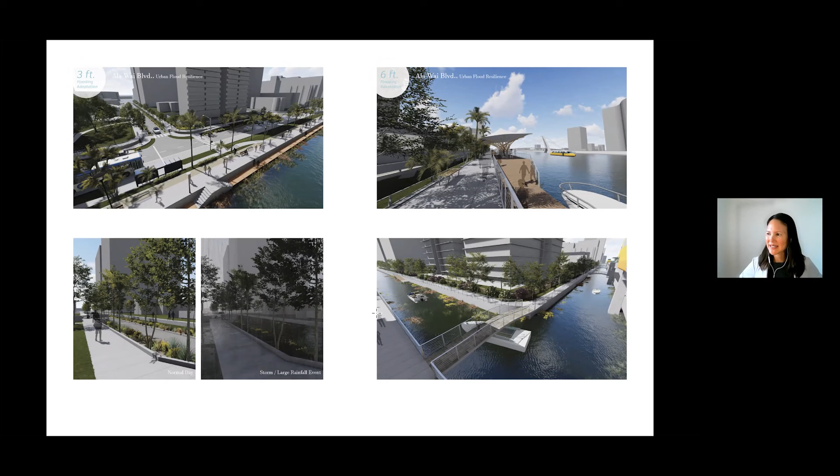I'd like to go around the room and have the facilitators share a short tidbit, a quick glimpse into their breakout discussion. So I will begin, and it sounds like it might piggyback off of what was just being discussed.

We were talking about dealing with, I think one of the things that we're grappling with are those lower below grade spaces and what to do with them when the water is starting to come in. Should they be filled? Should that water be pumped out?

And I think some of those pumping strategies are being used, and some of the questions that we had with regard to future fill would be: what is the quality of that fill? Does it contain any contaminants? And as water might encounter or come into contact with that fill, might it be problematic?

So I'll pause there and then hand it off to another breakout group. I'll hand it off to Dolan.

Okay, yeah, thank you, Wendy. And thank you everybody in our breakout group. I think we had a very fruitful discussion.

We didn't get beyond the building section. We spent a lot of time on adaptation options for the built environment, though it morphed into strategies applicable to open space, transportation, and utilities too. We focused on accommodating and adapting, including dry and wet flood proofing and relocating critical utilities—the low-hanging fruit, relatively easier to implement for existing buildings.